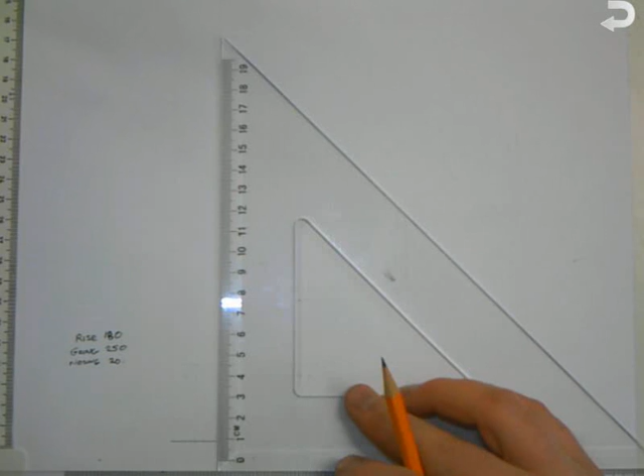Next, we'll put in the nosing. So to put in the nosing, we're going to measure out 20 mil, and you can draw this lightly to start off with. We measure up 25 mil, and then we're going to start drawing the top of the tread. Now, to draw the top of the tread, we need to calculate how far in this tread needs to go. Now, the measurement we're given is a going of 250.

So, what we're going to do is first of all mark off the going. So the going is from the outer point of the nosing here, in 250. That's as far as the nosing. Now we're going to measure in another 20 mil. That'll give us the end of the tread. Now, the reason for the other 20 mil is from this point here to this point here, that's our distance for our going. We're measuring in another 20 mil here to allow for the nosing on the next step up.

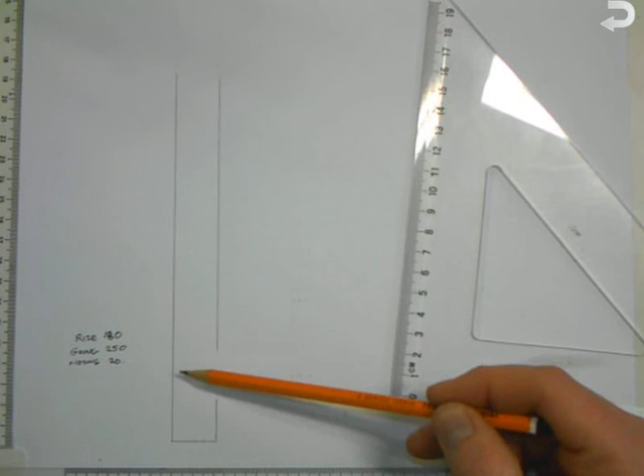So when we have this point here, we're going to measure up our 155 again. We're going to measure out our 20 mil. We're going to measure up our 25 mil. Now again, we'll draw it lightly to start off with. Then we're going to measure in our 250 plus 20. We're going to go up 155, out our 20, up our 25, and then we'll do the final one.

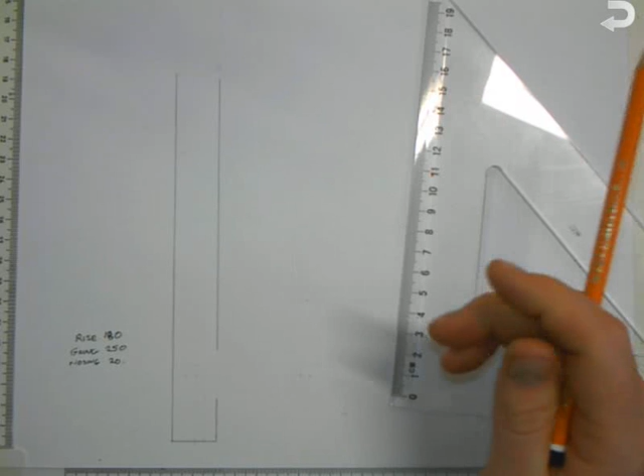And in this question you're asked for 3 steps, so we'll just start the 4th step. We won't be drawing in a full 4th step, so we don't have to measure in the full distance across here. Now, what we've drawn here is the outside of each of the risers and the top of each of the treads. So the next stage then is lightly draw in the bottom of each tread.

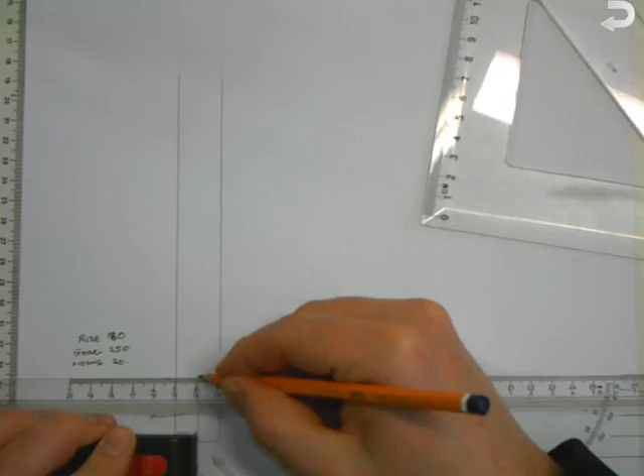And then we measure 20 mil for the back of each of the risers. So the risers are 20 mil, and at scale 1 to 5, we measure out 4 mil, and we can draw in the back of each of these risers in heavy. Now, what we're going to do next is draw in the bottom of each of the treads in heavy.

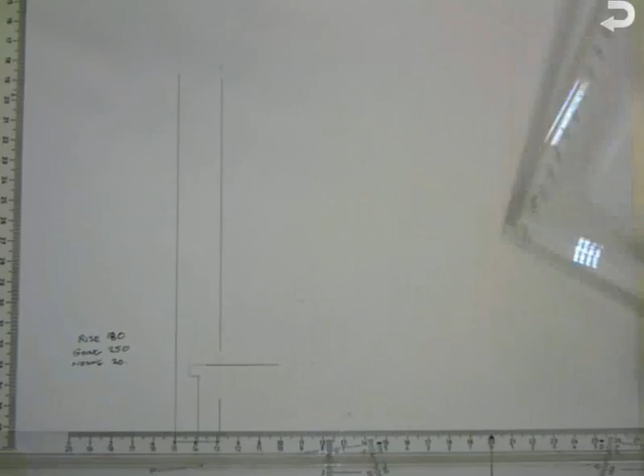Now, when we have each of the treads and risers put in, we have to focus now on how they're connected with one another. So, we'll zoom in on one of the pieces here and see how they connect together. So, we'll draw this line in heavy here. What we're going to do here is make this a tongue and groove joint.

So to make it a tongue and groove joint, from the outside of the tread we're going to measure 10 mil. Then we're going to measure down possibly 10 mil again. So on your drawing that's going to be 2 mil.

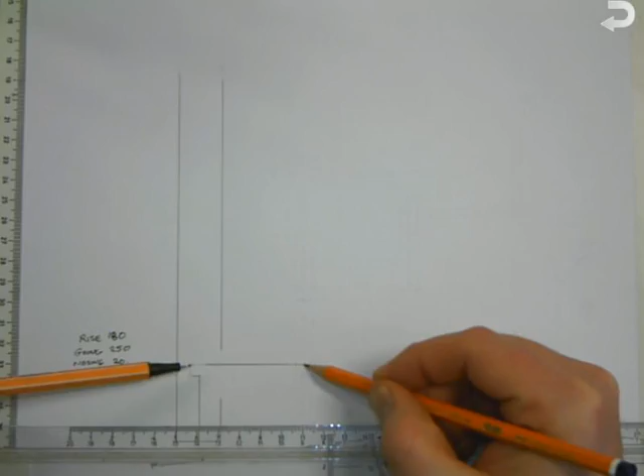And what we're forming here is a tongue and groove joint, showing how the treads and the risers are connected together. And this has to be done for each of the treads and risers as you go along. So measurements again from this point here up 10 mil, in 10 mil, and then back down. So this here is our tongue, and there's a groove taken out of our tread.

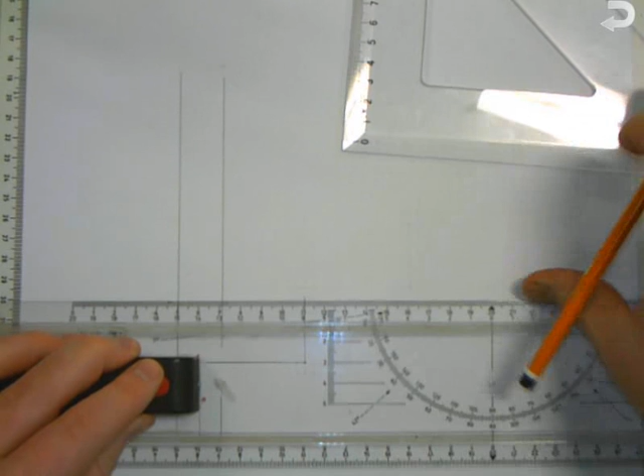Now when we're at this point we want to finish off the nosing. Now to finish off the nosing we'll draw it in freehand. Now the nosing of each of these treads will be rounded. Timber is never left with an edge on it because over time it'll get worn down anyway. So each of these treads here we just round it off, and we can do that freehand. And then we'll do the final one. And then we'll zoom out again, showing the entire drawing.

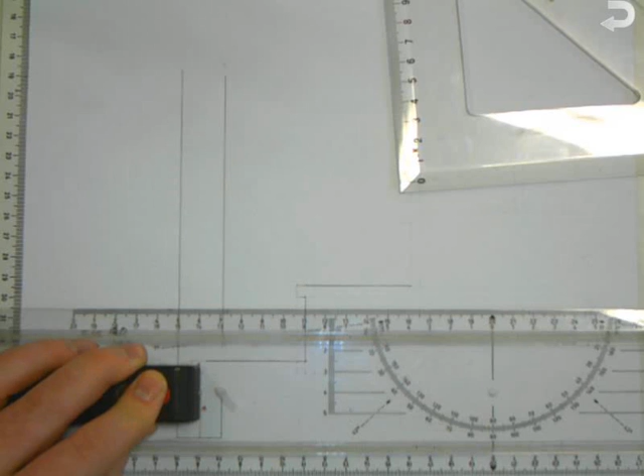And at this stage we can put in a nosing line. Now a nosing line is exactly as it sounds like. You connect all the nosings together and draw this red line here. And when it's done correctly, this red line touches each of the nosings here, and that'll give you the angle of the stairs, and that's how you see what angle the stairs is built at.

The next step that we have to draw in here is we have to put in the top of the string and the bottom of the string. Now, the string, if I position a pencil here and position a pencil here, this here is the position of the string. Now, it's parallel to this nosing line here, and a typical dimension for a string would be 250 wide. So, to position this on your drawing, you take an adjustable set square, or you go parallel to this red line and bring out a line perpendicular and measure out 50 mil on that line. So we measure out 50 mil here, draw the top of the string,

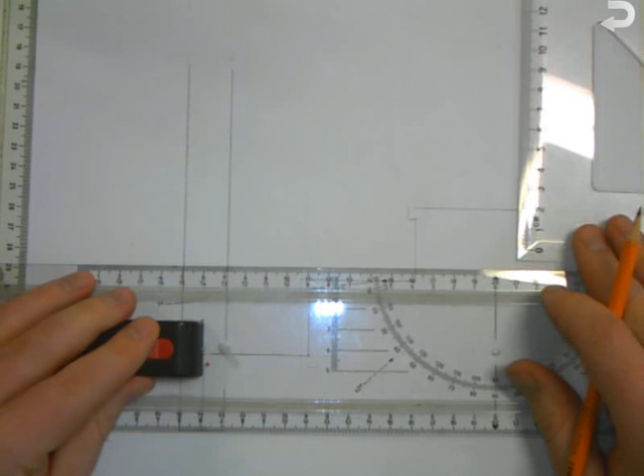and then we're going to draw the bottom of the string. Now, to draw the bottom of the string, we go perpendicular from the top of the string and measure down 250 mils. And then we draw in the bottom of the string, and the bottom of the string runs straight down to the ground. And to finish the very bottom of the string, just the newel post, bring a line straight over. So this is how the bottom of the actual string looks.

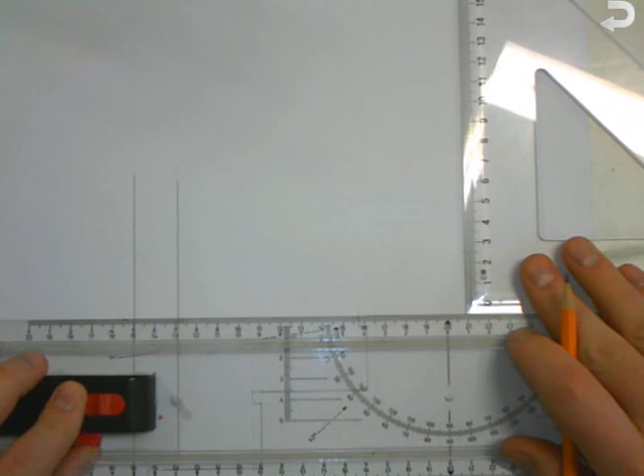Now, the next stage then, when we have the string put in, we'll put in the handrail. Now, you'll notice here on the newel post, I haven't the top of it drawn in because I didn't know how far to go up. The distance for a handrail is up 900 mils. That's the minimum it can go up. So we're going to measure from the nosing line up 900 mils. So it's right up near the top of the drawing here, up 900 mils.

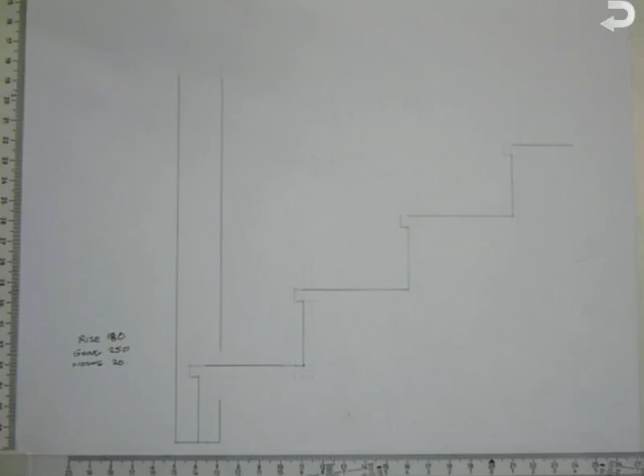And what we're going to do is draw the handrail. Now, the handrail is placed in at the same angle as the nosing, because it has to be the same angle as the stairs. So, when we measure up our 900 mils, we draw this line here. That's the top of our handrail. Now, if we measure perpendicular on the handrail somewhere, measure down 50 mils, because that's the thickness of the handrail. Now draw on the bottom of the handrail.

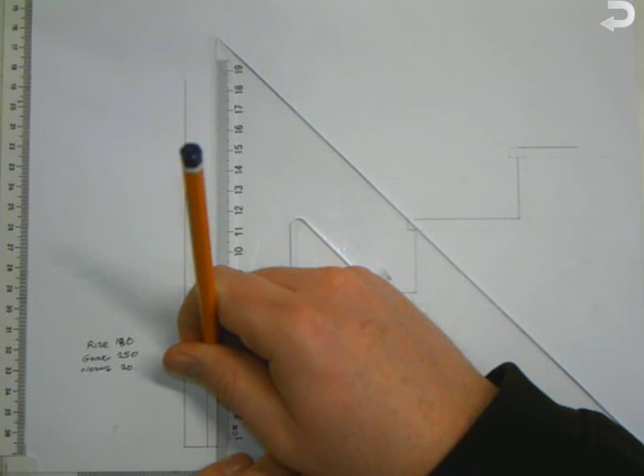Now, what we're going to do is put in a chamfer. So to put in a chamfer, we go 45 degrees from our 100 mil line up to our 20 mil line, and the same on the outside. And that's how we'll finish off the top of the newel post, with a simple chamfer. Now, that could be a sphere. It could be any type of turning as well. It could be even carved, the very top of the newel post. But in this example here, we'll just draw it as a simple chamfer on the top. And that's the top of the newel post finished.

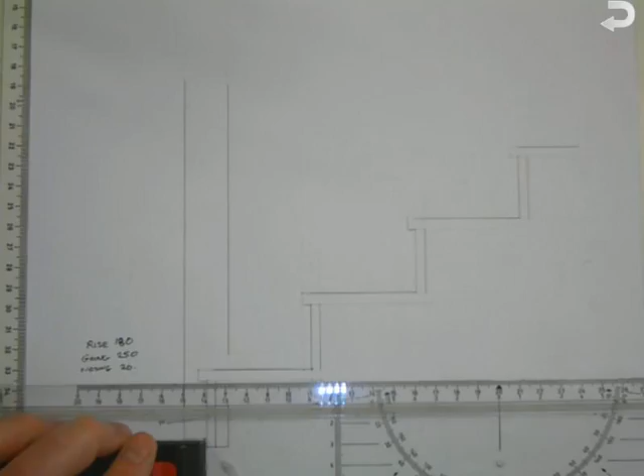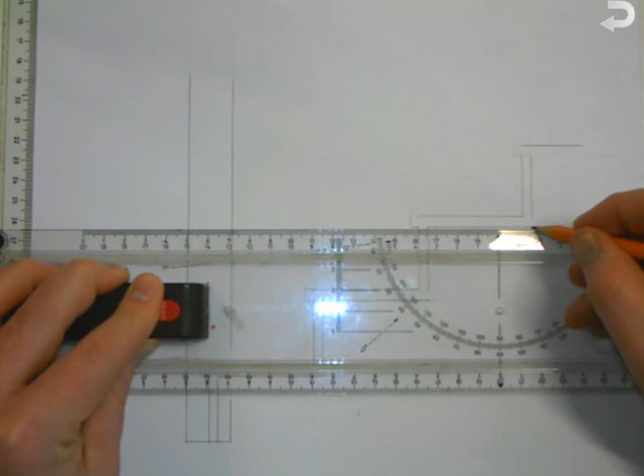Now, moving back down to finish off underneath the steps. Underneath each of the steps, you have glue blocks and you have wedges. Now, the glue blocks are 50 by 50. So, to draw them in, we measure 50 mils horizontal, 50 mils vertically, and we'll draw in our line connecting them together. We'll do the same on each of these points here, 50 by 50. And we'll do the same on this top one here. Now, to show the examiner these are made out of timber, we'll just mark in a few lines here, curves, just to show the end grain of these glue blocks.

So we can see the glue blocks put in. The last stage underneath the steps now is to put in wedges. Now to put in the wedges, there's no set measurements for the wedges. So I'll just zoom in on a section of this and go through it in a small bit of detail how we actually mark it in. And this can be used every time that you're drawing out wedges in this drawing.

What we're going to do here, from the edge of the glue block, we're going to measure down on your drawing 1 mil, and from the outside of the tread here down 3 mils. Now that'll give us a taper to represent the angle at which the wedge is put in at. And obviously the top of the wedge is horizontal. So that's our wedge that is driven in underneath your tread to attach it onto your string.

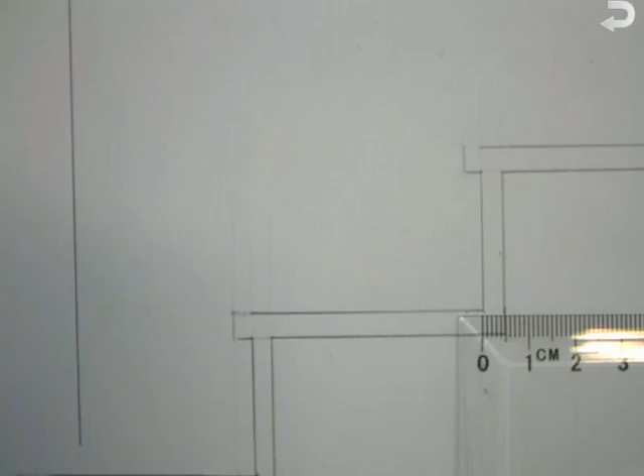Now if we go through that again, we measure down 1 mil on your drawing here, which in real life would be down 5 mils, and this here down 15 mils. So we join them together, and then the top line, bring it out horizontal. Now that's how you draw in the wedges underneath each of the treads. So we'll do the final one down here.

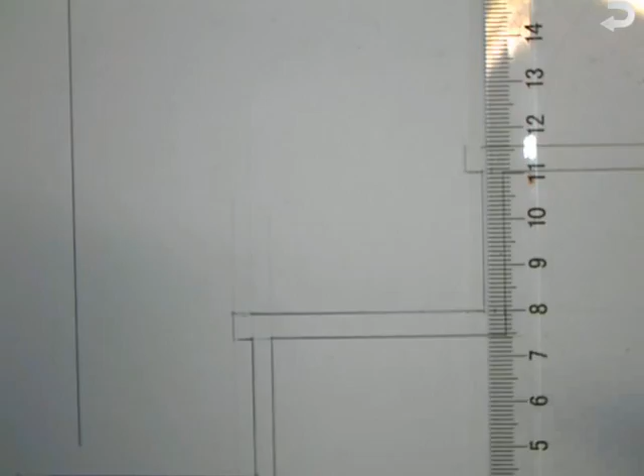Now the next stage then is to draw in the wedges that are behind the actual risers. So the wedges that are behind the risers, again we measure out 1 mil from the glue block here, and we measure out 3 mils here and use that measurement. And this time you'll notice that we're stopping it when it gets down to the bottom wedge here. In practice these vertical wedges are put in first, cut off, and then the horizontal wedges are hammered in and then cut off flush.

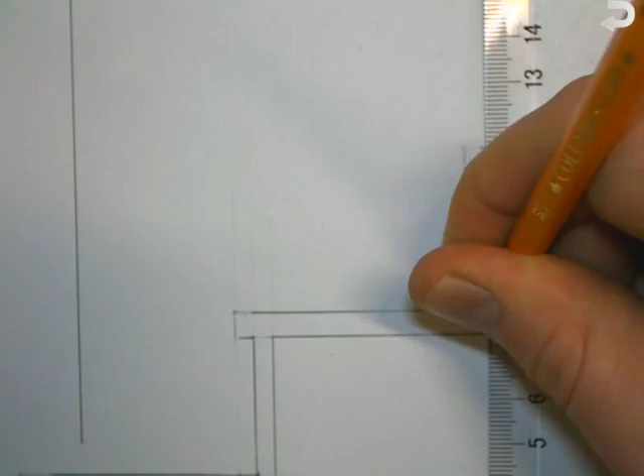So what we'll do, out 1 mil here and out 3 mil here, and the same with this one up here. And there are all the wedges put in place. Now there is no wedge put on the bottom step here, and the reason is this is attached onto the newel post, so there's no groove taken out of the string because this bottom riser is attached onto the newel post and not onto the string. All the other risers in the stairs are connected to the string.

So again, out 1 mil, out 3 mil. That's how we get our angle here. So in full scale that would be out 5 mil and out 15 mil. Okay.

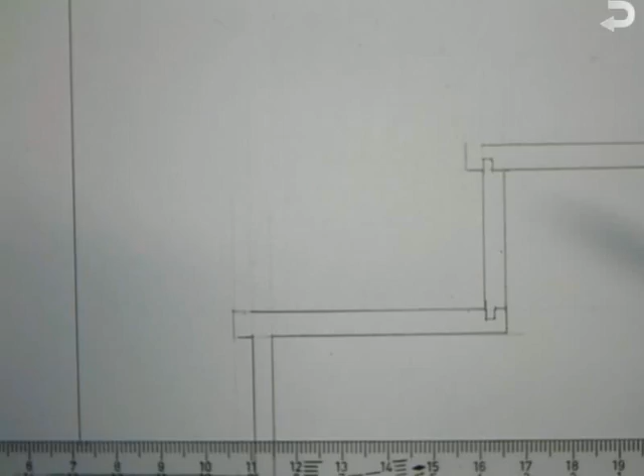Now the final stage of this drawing is to put in the balusters. Very simply, balusters have to be a maximum of 100 mils apart. So we'll make them 90 mils apart. So on this drawing, from our newel post, to measure for the first one, we're going to measure 90 mils. Then we're going to measure the thickness of it. The thickness of a baluster in this case is 40 mil.

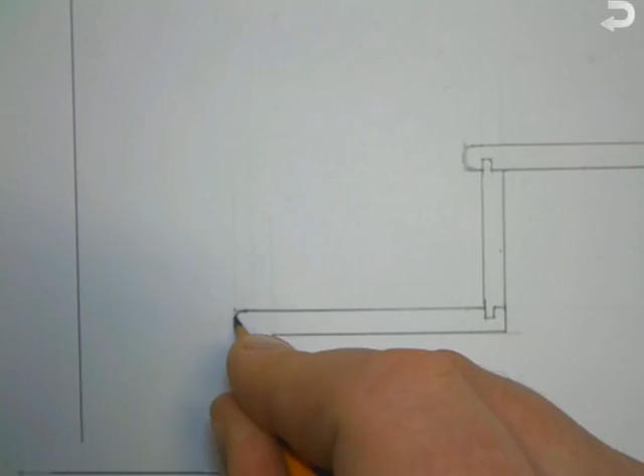Then we'll measure our 90 mils across again, then our 40 mils. And we keep going, 90 mils, 40 mils. Again, all this done to scale 1:5. So our 90 mils, 40 mils. Now you can take a straight line across there, and then all that's left to be done in this drawing is to draw up these balusters. And then we'll draw in one final one.

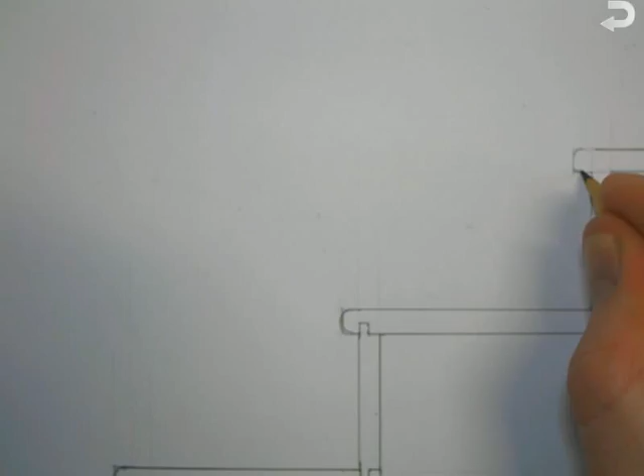Now, that's our stairs drawing complete. In the Leaving Cert you might actually be asked to put in a few dimensions. There's 3 or 4 key dimensions that you can put in on this drawing. The first key dimension will be the distance between the balusters here. So we put in an arrow here, and we'll show the measurement there.

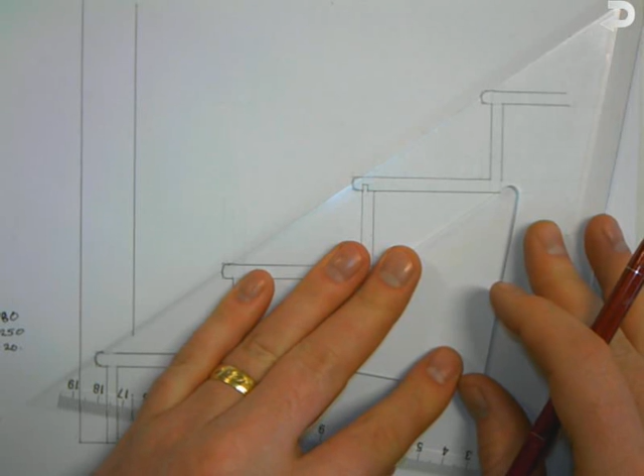Then another key measurement would be the length of the going. So we measure from one nosing to another nosing. I will write in the dimension for this. Now we'll mark in the height of the rise.

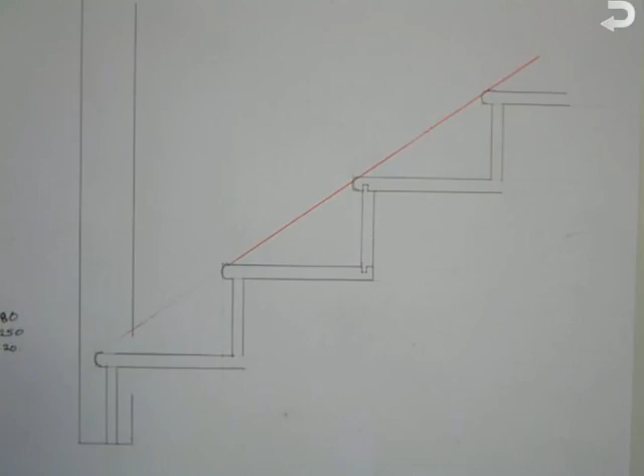So in this drawing we'll write in the rise, in this case 180, the going in this case was 250, and then we'll write in max 100, the distance between the balusters. And then the final measurement we'll mark in is the actual size of the nosing. So in this stairs we made the nosing 20 mm.

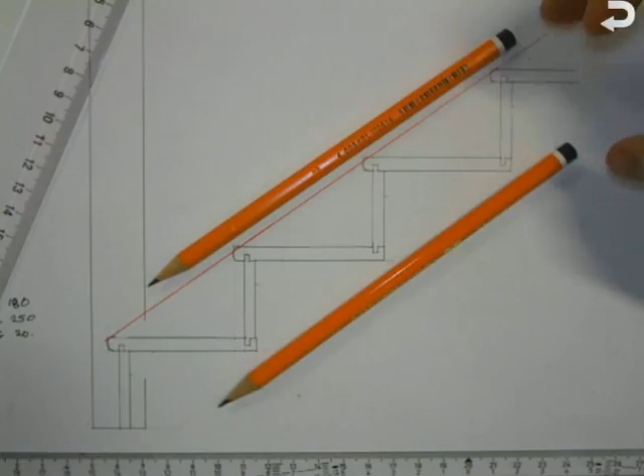And the final stage of this drawing is just to label each of the parts of the stairs. So you'll be labeling the riser, the tread, and when you're labeling the tread, the only size you put down is the thickness of it. You won't be showing the width or the length of it. When you're marking the string, you're going to write down string 250 by 50. The newel post will be 100 by 100, and that's just the thickness and the width of it. You never refer to the length of anything in this.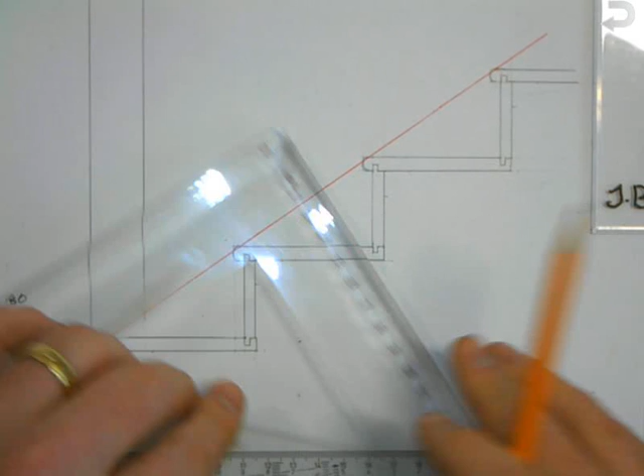Okay, so you just label all the different sections of this drawing. The easiest way to do that is, for instance, if we take the newel post, write down number 1, and then on the sheet, possibly along your left hand side here, start up near the top, write down 1, preferably in pencil. It looks neater if you do it in pencil. We'll write in newel post 100 by 100, and then we just do the same for all the other sections of the stairs.